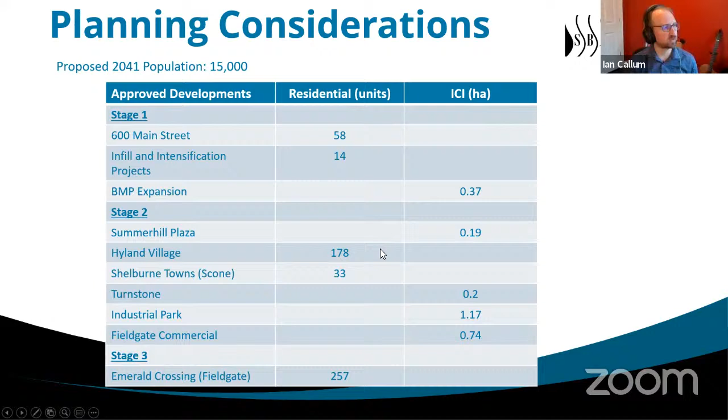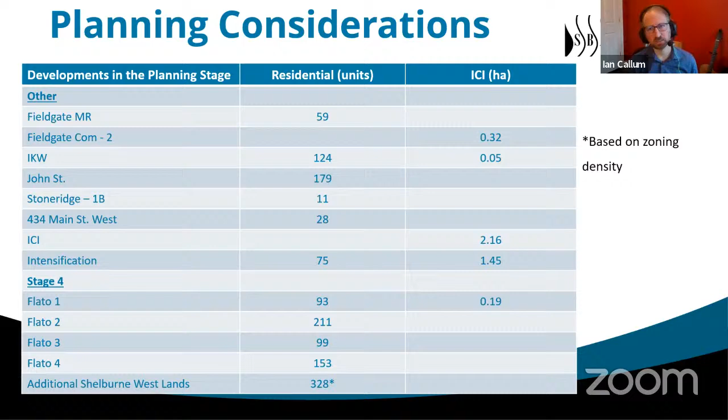This slide here just shows some of the proposed developments that are planned, and the amount of residential units associated with each of those. And those basically, once we added up all of those known planned developments, help us forecast the need for things like water and wastewater infrastructure for the town.

So beginning with water, we came up with the following problem opportunity statement, that being that the town of Shelburne needs to update the 2003 master servicing plan to ensure that infrastructure is in place to provide a safe supply of water that meets the town's needs for the next 20 years. And based on background information, we drilled a little bit deeper into that statement in the following slides here.

So for water, we broke it down into a number of different categories in terms of water infrastructure. Those categories being water supply, water quality, water storage and fire flow, and water distribution and demand.

In terms of water supply, sort of a mini problem opportunity statement that we came up with is that the current water supply cannot meet the current or future maximum day flow needs for the town of Shelburne. Now, instead of dealing with that in the master servicing plan EA, that is being dealt with concurrently through another water supply EA that the town is currently working their way through, that Schedule B Class EA process, to look at how they can best meet the town's water supply needs for the next 20 years. So that's how that one is being taken care of.

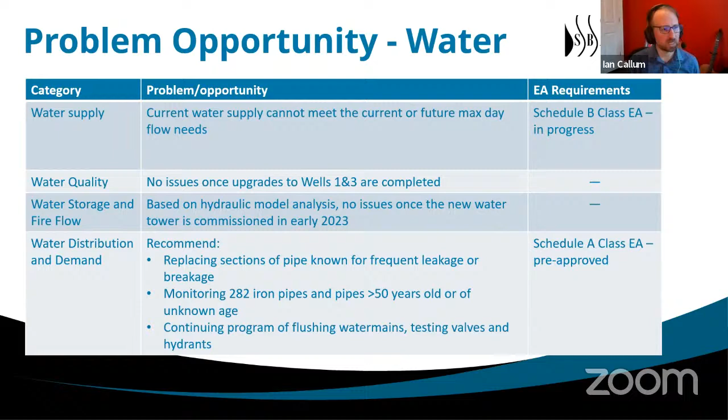In terms of water supply production wells, this map here shows where those wells are located within the town and just outside of the town boundaries in the case of wells 7, 8. And the red line here on this map really is just to show the watershed divide between the Nottawasaga watershed and the Grand River watershed to the west there. So we've got wells, water supplies, PW1, PW3. There's wells 5 and 6, which are located immediately adjacent to each other, as are wells 7 and 8. And I'm not sure if you can see it really well on this one. The triangle in sort of the middle there, just under well 3, is the existing water tower.

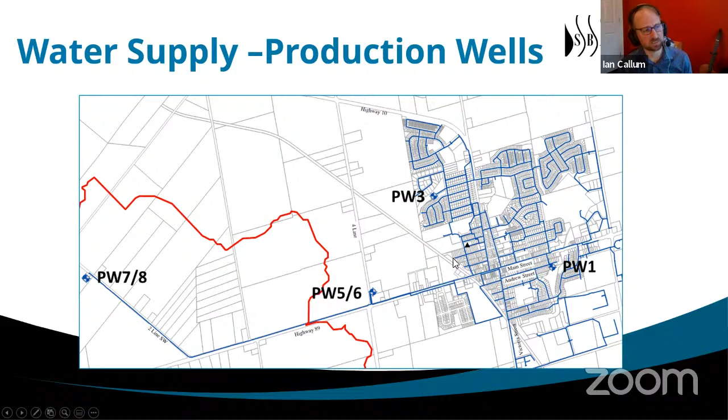So in terms of work that's currently ongoing at some of the production wells, there was an air entrainment issue, so some air bubbles getting into the water at well 1, and that issue has now been resolved. The town and OCWA and ourselves, SBA, have been working on a flushing plan for the chlorine contact tank to resolve some turbidity issues. And that well is scheduled to be back online this summer after confirming a sustainable pumping rate, which is done through a 72-hour pump test.

Well PW3 is scheduled to be back online next summer following some water treatment improvements and adding a new well pump with connection to a VFD, a variable frequency drive. And also some absorption filters for arsenic remediation and a UV system are also going to be added there for treatment.

At wells PW 7 and 8, the ongoing EA, the water supply EA that I spoke of a little earlier, and some source water protection work that goes alongside with that concurrently, those studies are being undertaken to determine if those 2 wells can be pumped concurrently. Right now, either well 7 or well 8 can be operational, with the other one acting as a backup. But the intent is to determine whether those 2 wells can be pumped sustainably with minimum impact to adjacent landowners and environmental features. And if that can be demonstrated and those wells are to go forward, there would be an additional well 9 that would then be installed in 2023 as a backup for those wells 7 and 8.

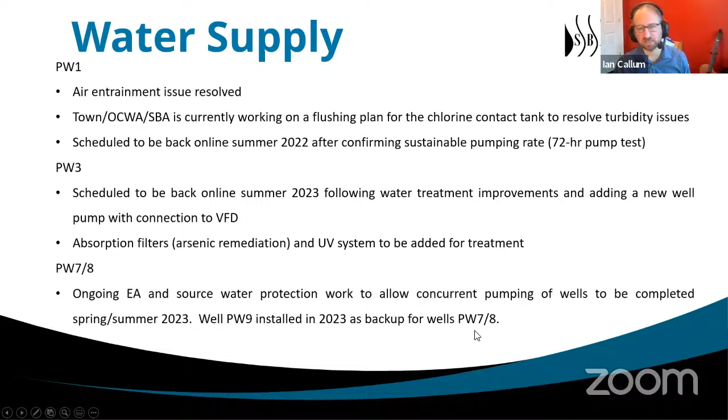So the graph here is basically looking at the average day flow, the maximum day flow, and how much water as of 2023 is being produced. So you can see here that the max day flow exceeds how much water is being produced somewhere around 2037. The maximum day flow will exceed how much water is currently able to be supplied. So we are currently undertaking that Class EA that I mentioned earlier to see the best means.

And you can see just on the bottom right the estimated sustainable pumping rates of all the current wells. And that results in a total sustainable pumping rate of 7,560 cubic meters per day. That would be that flat line just under 8,000 shown on the graph there. And that demonstrates basically that, although able to meet the average daily flow, for those maximum day flows where more water is being used, the town won't be able to meet that demand going forward, and additional planning will need to be done.

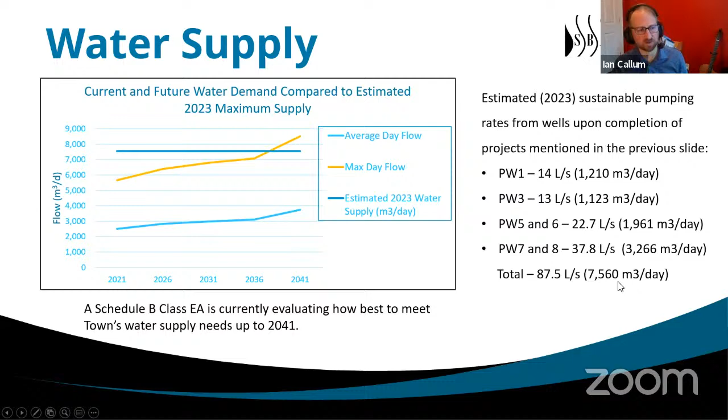Like you can see, though, that is conditional when you look at PW 7 and 8 there, producing 37.8 liters per second. That is contingent on those two wells being able to pump concurrently. So that is included in this analysis here, that those wells are able to produce concurrently. And that's the only reason why we're able to get up to that 7,560 cubic meters per day number.

Moving over to wastewater, the problem opportunity statement that we came up with for wastewater was that the town of Shelburne needs to update the 2003 master servicing plan to ensure that infrastructure is in place to provide adequate transport and treatment of wastewater to meet the town's needs for the next 20 years. And similar to what we did for water, we did break that down by some categories in the following slide.

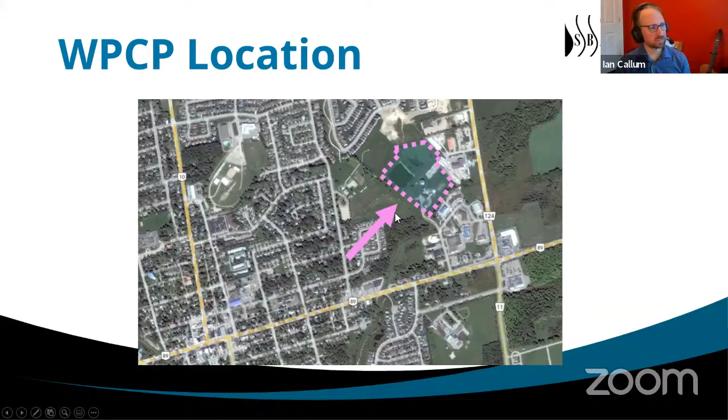So this map here is just indicating the location of the current water pollution control plant in the town of Shelburne. The water pollution control plant was built in 1981, and subsequently it was upgraded to an average day flow of 3,420 cubic meters per day of treatment and a peak rate of 8,921 cubic meters per day.

So this translates to a population of approximately 10,058 based on 340 liters per day per person, which is the historical rate that's been observed in the town. And with a current estimated population of just under 10,000, I think it's safe to say that that plant is at capacity and unable to meet the current projected growth demands, which would look like 15,000 people in the town of Shelburne around 2041.

Meeting future demand requires an average day flow capacity of 5,100 cubic meters per day and a max day capacity of 12,750 cubic meters per day. The water pollution control plant also requires a treatment system upgrade to be able to meet the future effluent quality requirements established through a study called an assimilative capacity study that was completed in 2020.

And the assimilative capacity study is a modeling study that is used to predict how effluent limits at different concentrations are going to be diluted and assimilated into the water course that the effluent is discharged to. And that study helped set the effluent limits that the current upgrades to the water pollution control plant are being designed to. And that study was approved by the Ministry of Environment, Conservation and Parks.

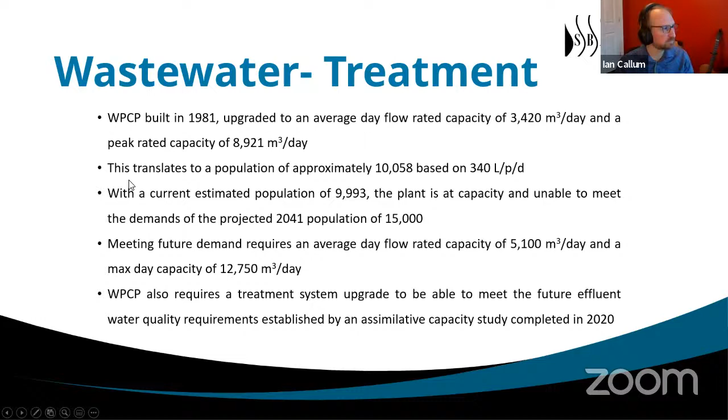So in terms of wastewater, the current wastewater treatment plant is at capacity, as we've alluded to earlier, and cannot meet the needs of planned growth for the town of Shelburne. And also a treatment system upgrade is required to meet the needed changes to the effluent concentrations.

So for that, a Schedule C Class EA is currently being undertaken, and the third Public Information Center for that was also occurring tonight at 6:30, a little earlier. A presentation for that, in case you missed it, is also available on the town's website as a YouTube video that you can view if you're interested.

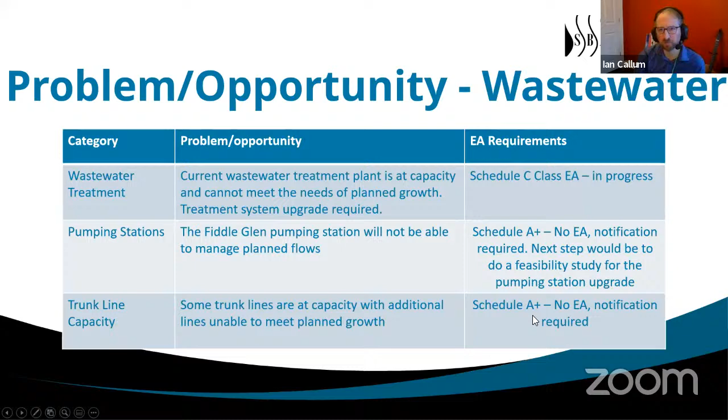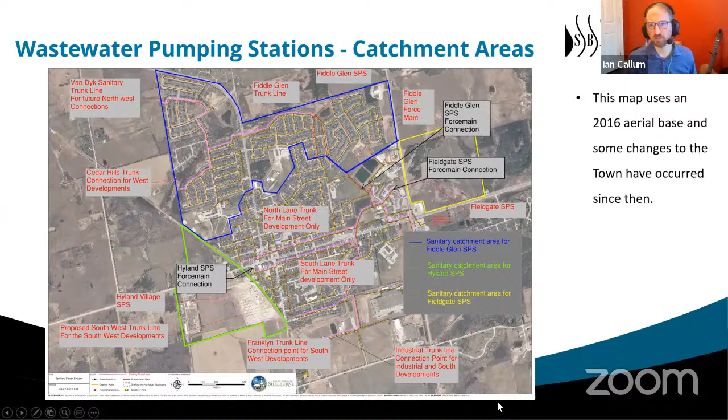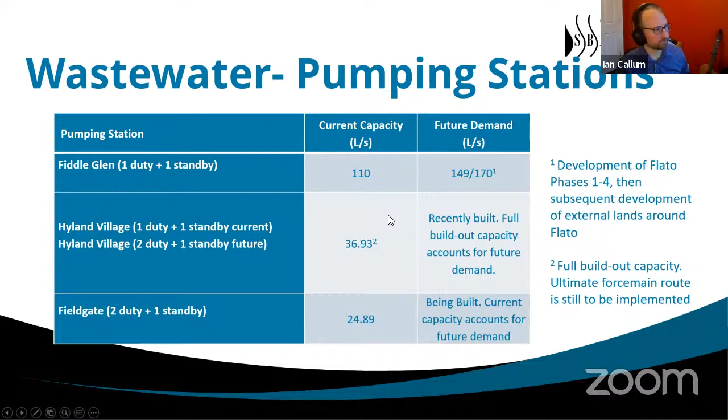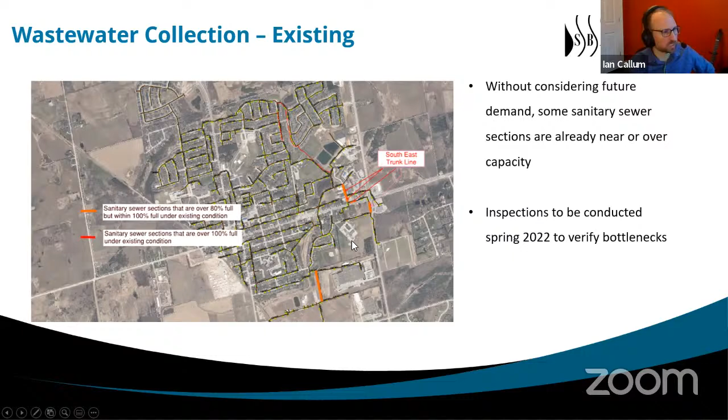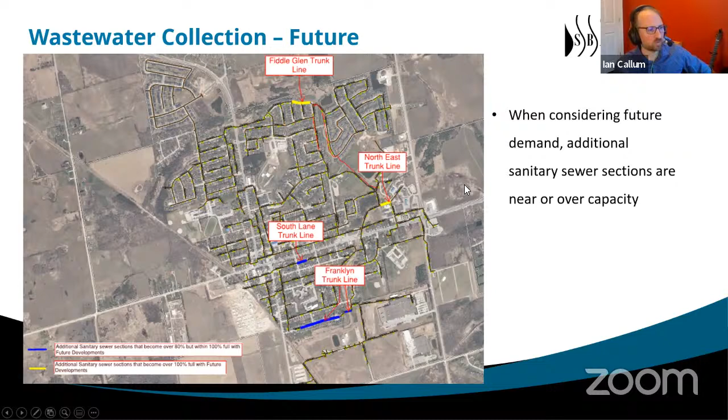And then we also, as part of this EA, sort of on top of the water and wastewater, looked at some stewardship opportunities that the town could undertake. And starting in 2002, the town started working in partnership with the Nottawasaga Valley Conservation Authority to start implementing the Boyne River Stewardship and Monitoring Plan, which was developed also in partnership with the Conservation Authority. And this plan focuses on maintaining the cold water habitat in the Boyne River and improving the aquatic habitat there.

So we talked a little bit in the earlier presentation tonight that the water pollution control plant discharges into the Besley Drain, which then has its confluence with the Boyne River. And so some of these opportunities here are just really to enhance the habitat in that and to protect the aquatic habitat in the Boyne River there.

And some examples of some of the projects that are being considered there are tree planting, removal or redesign of some in-stream ponds, which I guess the issue with the in-stream ponds really is that they heat up the water a lot quicker than flowing water, and therefore can affect that cold water habitat that is necessary for cold water species which inhabit the Boyne River. And also working with farmers to avoid animals entering the river is another stewardship opportunity that we're working on.